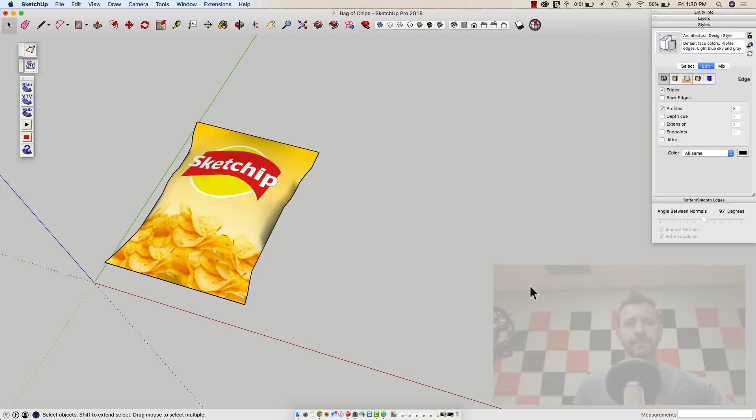All right, so when we hop in here, we can see a couple things. Over here I have the extensions I'm going to use. Up top is Vertex Tools. Below that is Fredo Tools. And below that is Soap Skin and Bubble.

So I'm going to start by creating my initial geometry with a rectangle. I'm just going to use a regular old rectangle. I'm going to draw it right here. Looks good, it's about the shape of my other bag of chips.

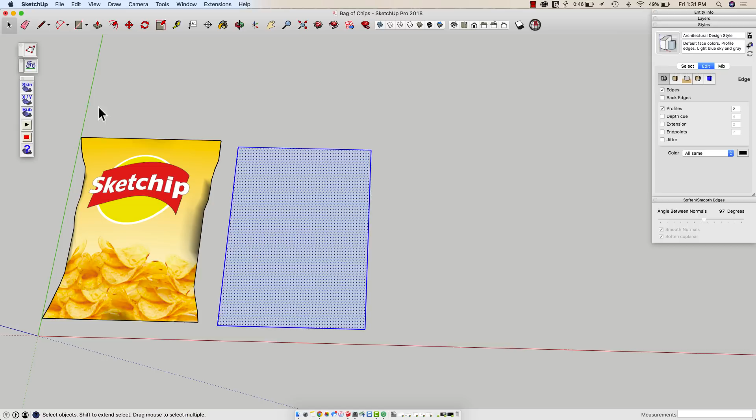I'm going to select that geometry, and then I'm going to hit the Generate Skin button in Soap Skin. All right, 10 divisions. I'm going to try bumping up a little bit to get a little more fidelity in there. All right, 14 looks good. I'm going to hit Enter.

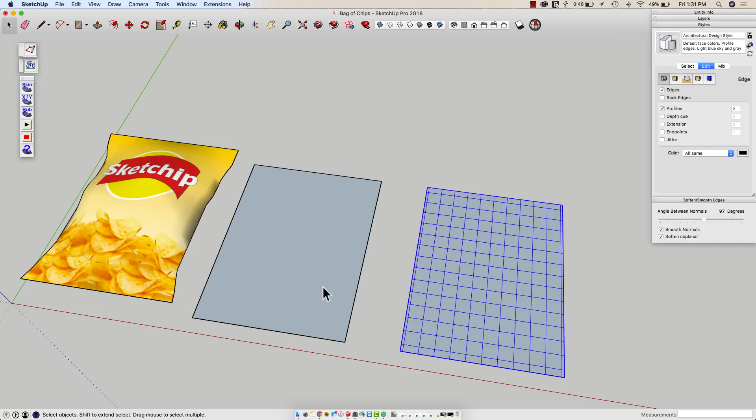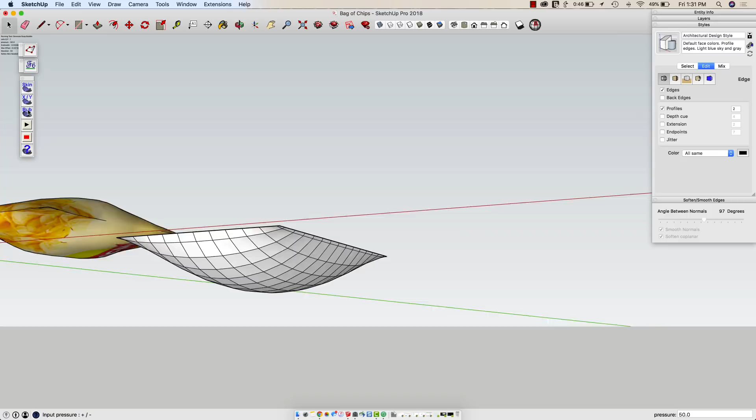So what I can do then is take this geometry and apply a force to it. By selecting that grid and then hitting the bubble button, I can now enter a pressure. Let's try something like a pressure of 50 and hit Enter. That looks a little overstuffed for our bag of chips, so maybe we'll dial that down to how about 35? All right, that looks more like it, that looks better. Okay, so I'm going to go ahead and hit Enter to accept that.

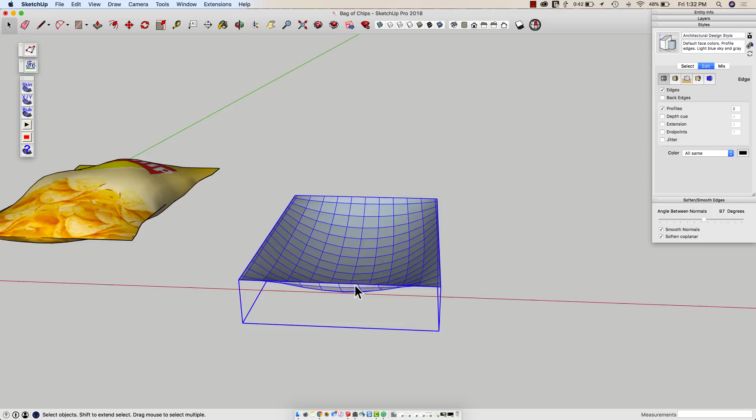And now you can see I'm already way quicker, way further along than I was last time. I can take that, and just like I did in the other bag of chips, I'm going to use Move to make a copy of that. I will use the handles to flip it over, and then I will put it on top of the original.

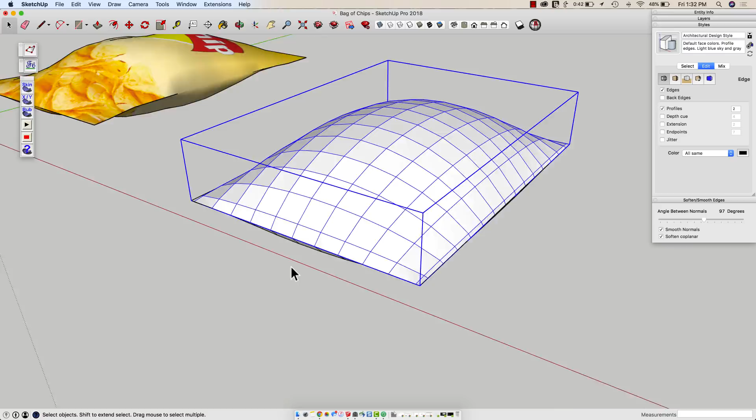So one thing we didn't have to worry about was realigning these edges, because one of the things that Soap Skin does is it holds the edges and applies forces to the rest of the surface, so I don't get any warping or movement on the edges. I'm going to grab both pieces, explode them, and there you go. Now I have a single piece there.

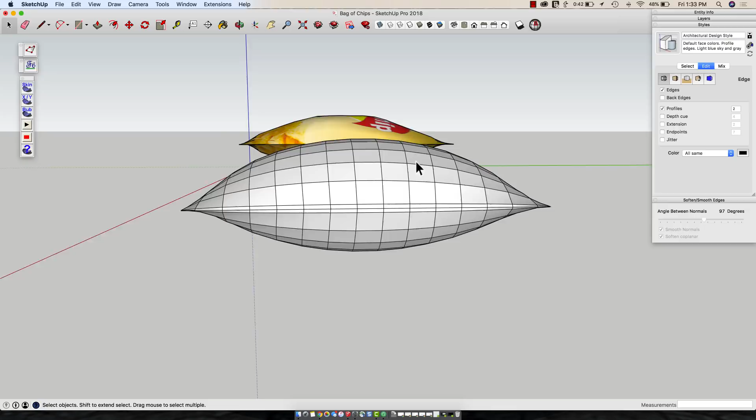All right, so it looks pretty good. Now I want to do a couple things. I want to add some irregularity. This is a little bit too, I don't know, too pretty, too perfect. And I also want to get these kind of crinkles along the side.

So I'm going to do that using Vertex Tools. I'm going to start similar to what I did on the other bag. I'm going to grab these edge pieces, and instead of using Move, I'm going to grab Vertex Tools. When I first click Vertex Tools, you can see what it does. It gives me a dot on every vertex, every point in the model, and the ones I selected are turned red, and you'll notice there's kind of an aura around them of different colors.

So what happens is it's going to fade from red back to blue. Blue are not going to move when I grab this widget and move it, but the other ones, the yellows and greens, are going to move a little bit. Similar to the tool we used in Sandbox Tools when we used Smooth, I do have a soft select radius right here, currently set to 3 feet, so let's just see what happens when I drag that and move it in. Look at that. That was all one step, and it basically gave us almost exactly what we had over here.

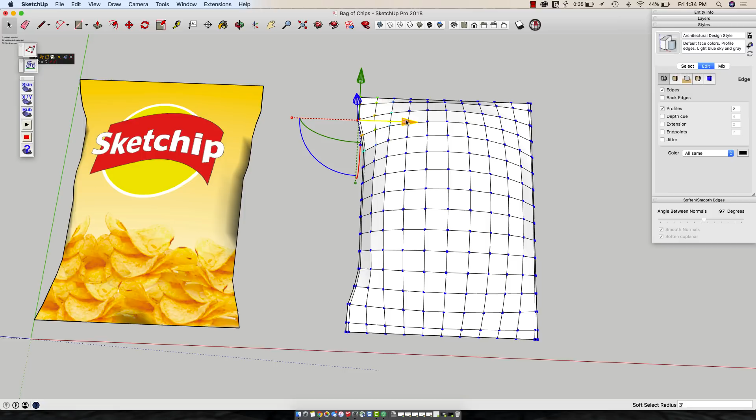Again, there's no irregularity because I just grabbed one piece, but now I can come in here and grab a smaller piece. You just grab like that, move that in or out.

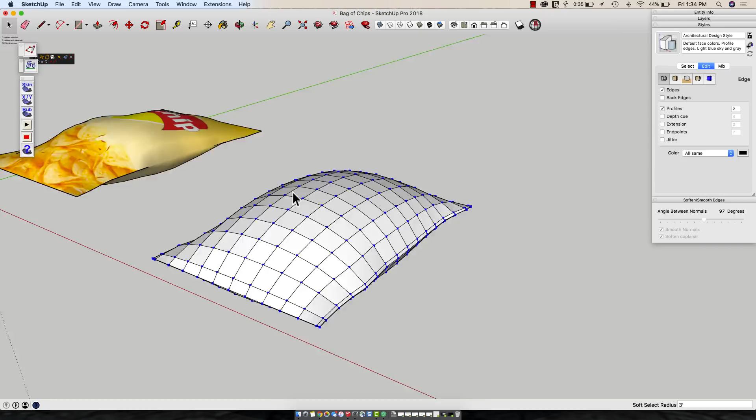But much quicker, much easier to do similar steps. I could do the same thing here. Let me do the other edge real quick, and then we'll mess with the middle a little bit. I'm going to slide this in, maybe grab these guys down here, slide them in, even pull some pieces back out if I want to, just like I did in the other one. Real quick and easy way to modify that geometry.

Now maybe in the middle, maybe I'll come in here and grab like this. Instead of using Move this time, it did select all the way through. I'm going to use the Scale tool to just kind of squish the bag in a little bit in the middle.

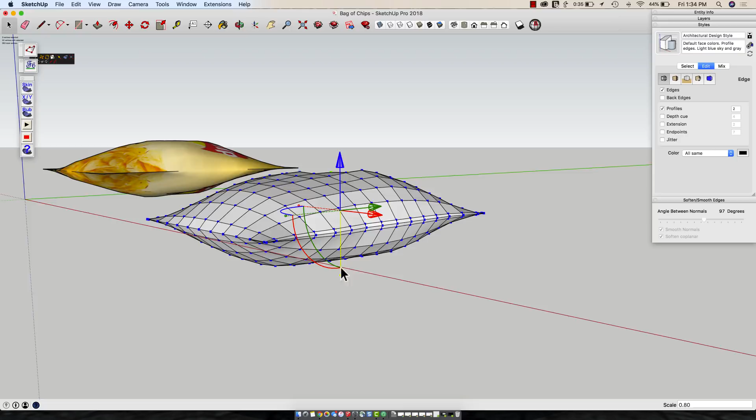Maybe I'll just grab some more points right here, do the same thing, just kind of slide it in, give myself a little bit of a dimple, kind of going for just an irregular shape.

Kind of cool if I selected an angle like this, I get them on the front here and then further back here, so when I scale that, it's not going to give me an even, both sides poking out the same spot. It's actually going to give me irregularity between the front and back, the top and bottom.

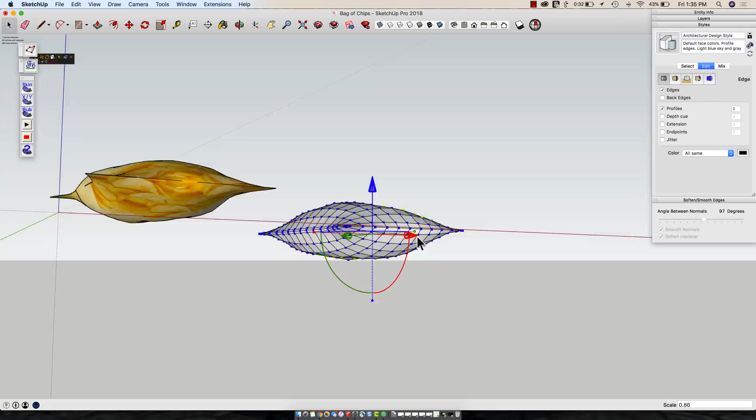All right, so that looks pretty good. If I triple click right there, I'm going to come in here and toggle smoothing on and off again. Man, we are pretty close to where we were at about 7 or 8 minutes into this model, and we're only a couple minutes in.

Let me show one more extension here, and that is Fredo Tools. Fredo Tools is a great set of extensions. It actually has a whole bunch of mini extensions, a whole suite here. The one I want to look at in this particular model is ThruPaint.

ThruPaint allows me to pick a material. I'll just pick off of this existing one and then paint it onto this surface.

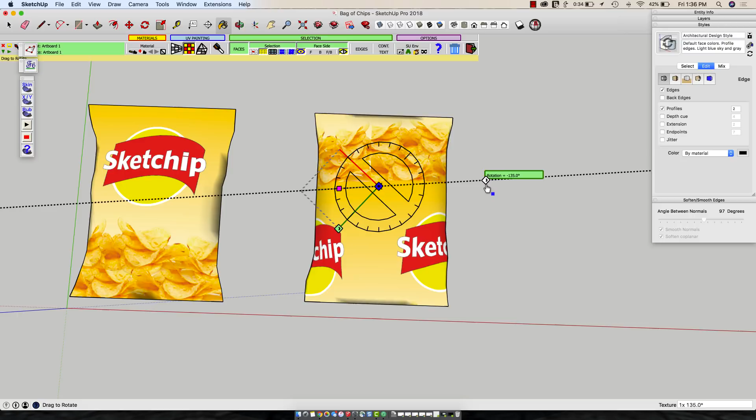Now at first it seems, whoa, that's a little off, a little awkward, a little weird, but what I can do is actually enter this visual edition mode, and this allows me to do things like get this spun around so it's facing the right direction, and then we'll actually grab it and move it. This is not something you can do on a broken mesh like this in regular SketchUp.

In SketchUp I can do this on a single surface, but if I want to do it on a mesh like this, I have to adjust the projected image and then come back and reapply it.

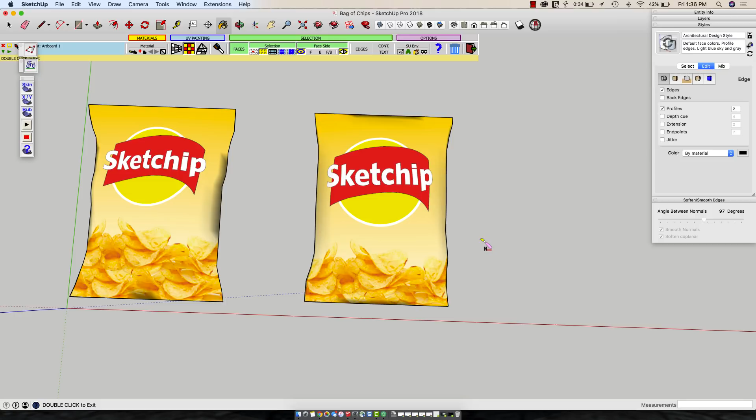So this is only a piece of what ThruPaint does. It gets into UV mapping and a whole bunch of other stuff that honestly I don't really get that well. But just for the purpose of applying that texture to that mesh, well worth the work, well worth downloading that free extension if you do any kind of texture mapping on irregular surfaces.

So in there, in just a couple minutes, we've modeled that whole bag of chips in a fraction of the time of what we took with the native tools.

So we have a little extra time now. I've got time to kill now. I'm not sure, I usually have this problem. It went too fast.

All right, I guess we'll call it there.